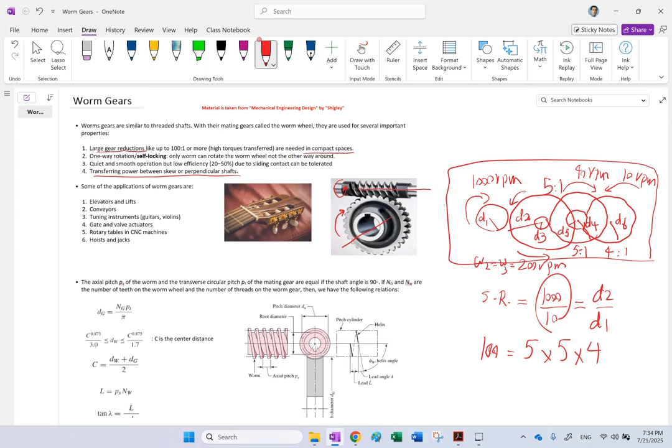Now, of course, in this X direction here, you need quite a bit of space to include all of those gears. If you don't want to do all of those gears, which equals space and equals cost and money, you can do it with a single worm and a single worm wheel. These guys can reduce the RPM by factors up to like 100-to-1 or even more in a compact space, and so they can also transfer big torques.

Now you might say, how come? Well, per one full rotation of the worm, when this worm goes one full rotation, or 2 pi radians, guess how much this will move forward? Because the teeth of this wheel are being pushed by these threads, and the amount of displacement for each thread is only 1 pitch, correct? When you rotate it 2 pi radians, it only moves by 1 pitch. And since each one of them is in contact with one of the teeth here, all you will get here for the rotation is simply 1 tooth.

So all this guy will rotate is 2 pi divided by the number of teeth. So you see the ratio is going to be n-to-1, where n is the number of teeth on this guy. So if this guy has 100 teeth, guess what? Your speed ratio is going to be 100-to-1. And it does it beautifully, okay? So that is the first thing, huge gear reduction.

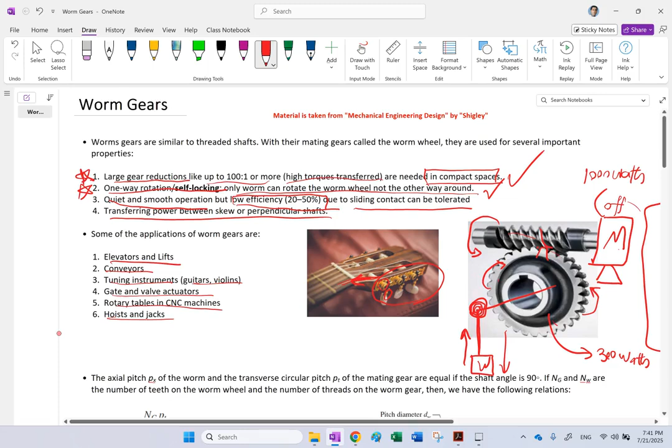The most important properties are huge gear reduction and self-locking. These are very important. That's why you typically see them after motors, because motors have huge RPMs and we don't need that much RPM. So this guy is spinning like 1,000 RPM, and I want to bring it down to maybe 10 RPM. Instead of a multi-stage gearbox, I use just one of these.

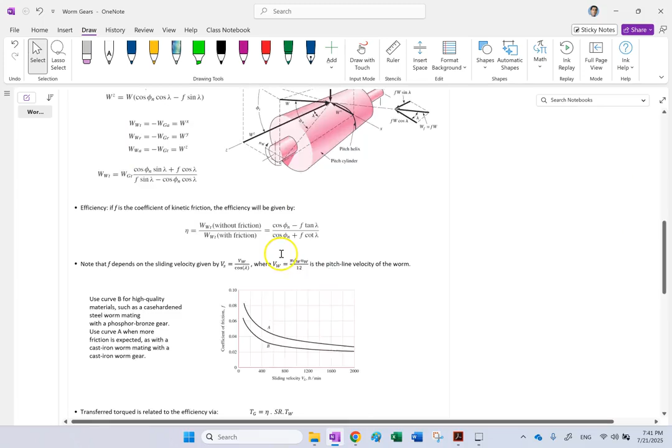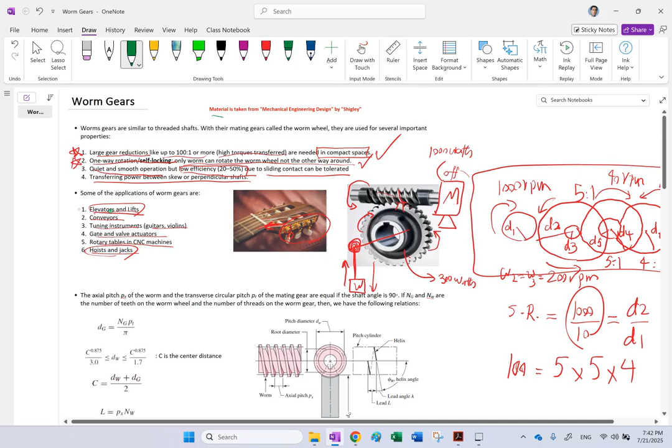The other thing it can give me is self-locking, which could be very useful, especially in elevators, lifts, hoists, and jacks. So now let's look at some parameters of the worm and the wheel - kinematics parameters, force analysis, efficiency, and transfer of torque. There are a few things we need to care about. Finally, as a bonus, I will solve one problem involving worm and wheel so you know how to deal with problems here. As in my previous videos, the material is coming from Shigley, Mechanical Engineering Design.

Now that we know it, let's look at some of the parameters involving this kind of gear. Here is a picture of a worm from the side view and the front view, and this one in gray is the worm gear, or the wheel, you might call it. So what kind of parameters do you have?

The worm is similar to a thread, so you can expect it to have something called an axial pitch, which is the distance from one tooth to another, or one thread to another - that's called axial pitch, px. The second thing is different diameters. The diameter we care about here is the pitch diameter, which is the diameter of the circle here that is tangent with the other circle. You could also define a root diameter, from root of the tooth to root of the tooth, and similarly a maximum diameter. But the one we really care about is the pitch diameter, d of the worm.

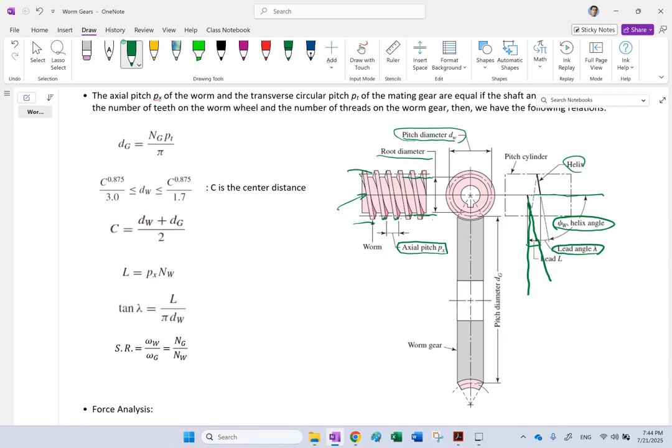These threads are on a helix, so you will have a helix angle. Helix angle, or psi, is defined as the angle between the axis of the worm and the tangent to one of the threads or teeth. The angle that this tangent makes with the vertical axis, on the other hand, we call the lead angle, or lambda. In this picture, lambda plus psi equals 90 degrees. So you either make the angle of the surface with the axis of the shaft or with the vertical to that, and call it either lambda or helix angle.

The other thing is the lead. The lead is basically the distance between two similar points - the distance from here to here. You might ask, what is the difference between lead and pitch? Because they look similar. Well, the answer depends on how many threads there are per one revolution.

If in one revolution you only have one tooth engaged, then lead and pitch are equal. But if you have more than one thread in the worm causing the linear motion, you show that by NW, the number of threads or teeth it has. Then the number of teeth times this pitch is going to be equal to the lead.

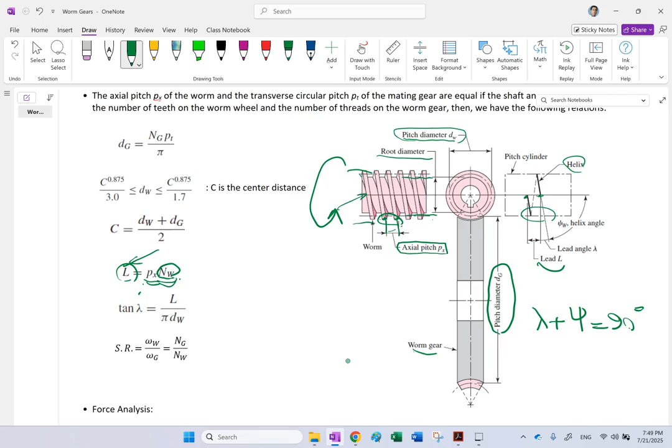For instance, the diameter of this pitch circle here can be defined as n, the number of teeth on it, times p—this p is the circular pitch in the transverse direction for this gear—divided by pi. Because if you remember, the definition of p transverse was pi times d divided by n. So if you solve for d, it's pn over pi. So the formula you had for the spur gear is still valid here.

Now c, the center to center distance, is the distance from this point to this point here—that is your c. Clearly it is this distance, which is half of dg, plus this distance, which is half of dw. So that is similar to any other two gears. Center to center distance is always the average of the two diameters.

Now, one formula common for these worms and wheels: if you want to pick a number for the diameter of the pitch for the worm, make sure it is between c to the power of 0.875, or 7 over 8, divided by 3, and c to the same power but divided by 1.7. So if you want to pick a worm and know the diameter of its pitch based on the center to center distance, this is the good range to pick. And you might ask, where does that come from?

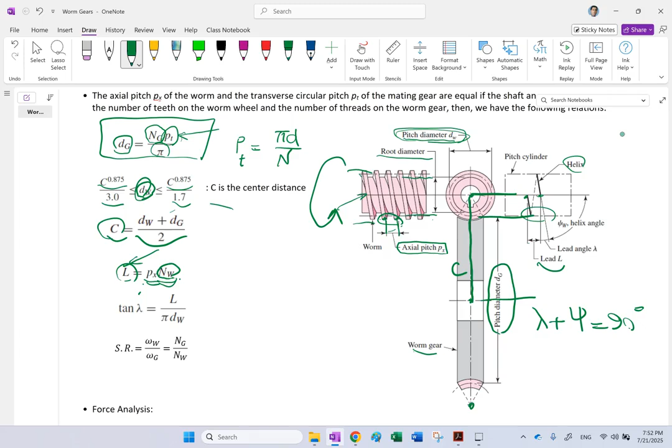If you pick it in this range, you can optimize the efficiency number. So if you want bigger efficiencies, you have to pick a dw in that range. If you pick it outside the range, you are going to get lower efficiencies. This is an empirical formula, clearly.

What else do we have? The speed ratio is the omega of the worm, because the worm is always the driving member, over omega of the wheel, which is the driven. It can simply be written as the number of teeth on the wheel divided by the number of teeth or threads on the worm. The same formula we had in the spur gears also applies to the worm and worm wheel. So if I have only one thread here and 100 here, you get a speed ratio of 100 to 1.

The next thing is the relation between the lead angle, the lead itself, and pi dw. If you unwrap one of these teeth as it goes around, you see that basically you're going to get something like this.

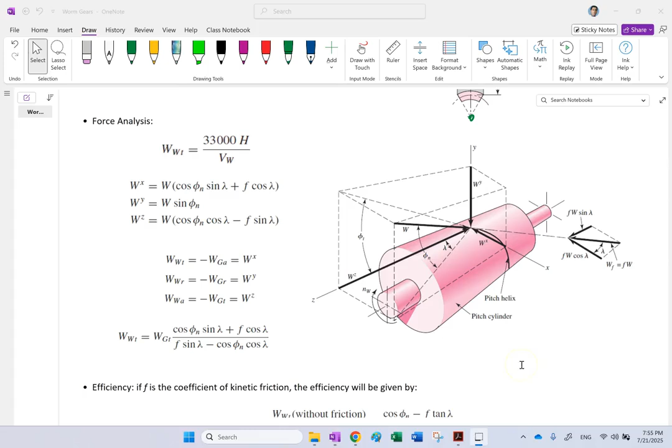Now, what about the force analysis? Force analysis is quite a bit interesting. Why? First of all, between the tooth of the wheel and the tooth or the thread of the worm, there is a three-dimensional force exchanged.

Which has three components. It has this vertical component Y, which is like a radial component. It has the other radial component X, and it has an axial component Z. Now, between these, the X component is, although it's radial, it's also a transverse component. So X is the one that is gonna create the torque.

You can see it here. Wx is the transverse component. Y is the radial component. And Z is clearly the axial component for the worm. So this is the force, this is the normal force between the two teeth.

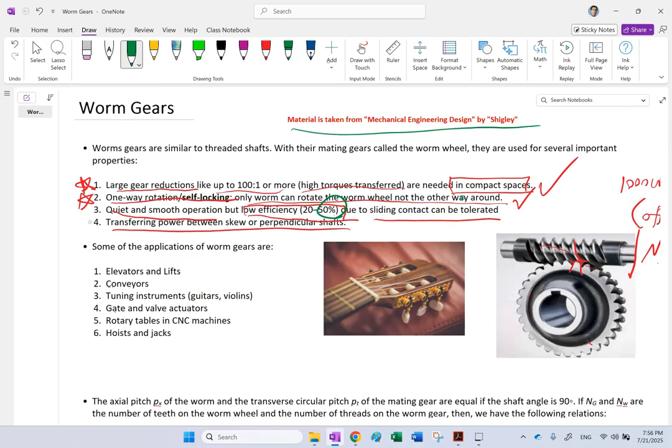But that's not the only force. Remember, I said that here you have friction. The tooth of the worm and the wheel are sliding against each other. It's all about sliding contacts. So there should be some kinetic friction force as well.

And this guy here is your kinetic friction. So you have two major forces. One is the W or the N force, the normal force. And the other one is the friction. And these are just their components.

So which direction is the friction? Of course, the direction of the friction, if you look at it, it is tangent to the helix. It is tangent to the tooth profile, the tooth or the thread of the worm. So it is tangent to that. It is in that plane.

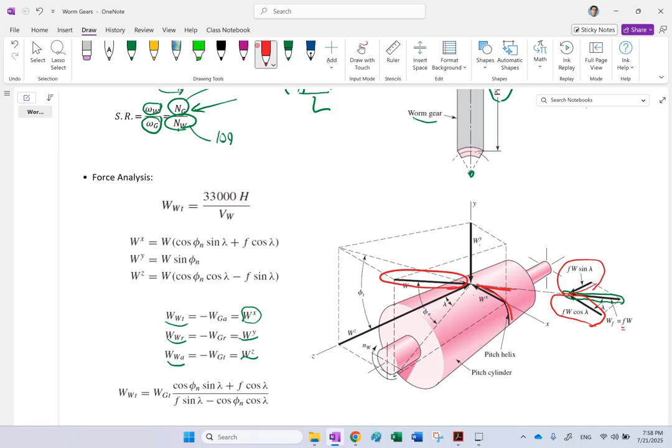So I can break it down into two components. One that is in the axial direction and one that is in the transverse direction. So my friction force, which is F, here this F acts like mu, the coefficient of kinetic friction, or mu k. If I multiply that by the normal force, and W here acts like N, the product of them is the kinetic friction, Fk.

So in other lectures of mine, you see I say Fk equals N mu k. Here it says Wf equals F times W. But that's the same thing, this is kinetic friction. And you have two components, sine lambda and cosine lambda.

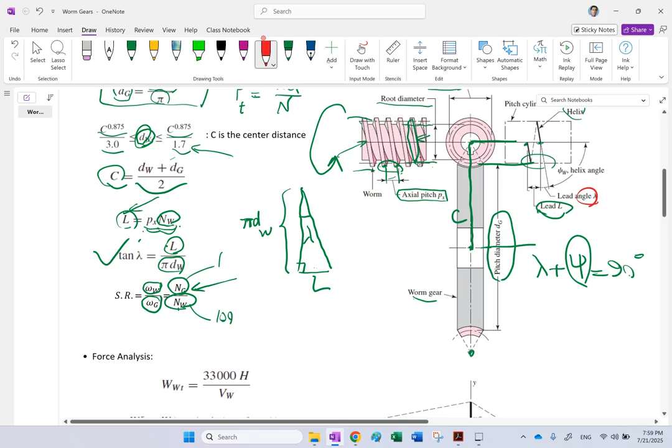Why? Because this angle here is your lambda. That is this same lambda angle, and you know that lambda is the angle that your helix is making with this vertical direction, and that is exactly what you have here. This is that vertical direction, and this is the direction of tangent to the tooth, so that is your lambda. So here you have these two components.

Now this tangential transverse component, Fw cosine lambda, this is added to that Wx. You can see it here, look, this is this guy. And this one, which is the axial component, this is in the opposite direction of W, so it should be subtracted from that, and that is what you can see here. So those two components that you see, those plus and minus Fw cosine lambda, those are the friction components.

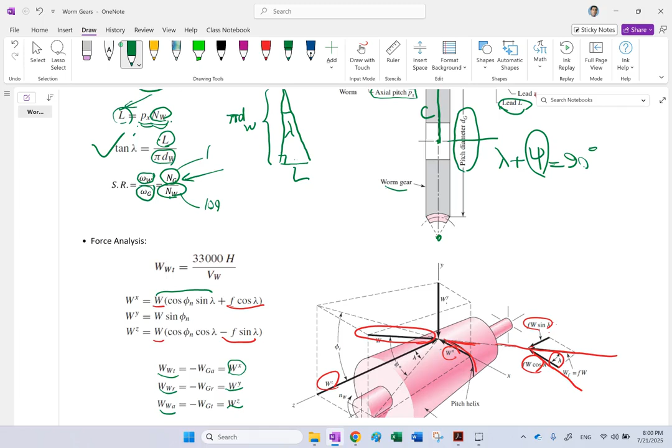Now, what is the rest of it? The rest of it are clearly these guys here, this W cosine phi n sine lambda, W sine phi n, and W cosine phi n cosine lambda. These are your W, X, Y, and Z in this picture, and you can clearly see why, because your W has this angle phi n, which is your normal pressure angle, and it has this angle here, lambda.

So when you want to decompose this W along X, Y, Z, you have to use sine phi n and cosine phi n, and then sine lambda and cosine lambda. So you get these three forces, and as I said, these three forces, the X one is the transverse one, that's the one that transfers the torque. The Y one is the radial one that is applying to the bearing, and the Z one is the axial one that wants to move the worm left and right.

So you need to have some bearing on this side or that side that has an axial load and doesn't let the worm move.

Okay, so you see that the formulas for the force in a worm are quite a bit involved, and I just explained that to you. Now let me show you this middle part here. What is this middle part?

Let me explain that. By the way, the transverse component of the force for the worm, which is this guy here, as I said, is the one that transfers the power or torque. So you can find it by the same formula we had in spur gears, which was 33,000 times H over V of W. H here is your horsepower, the horsepower applied to the worm, right?

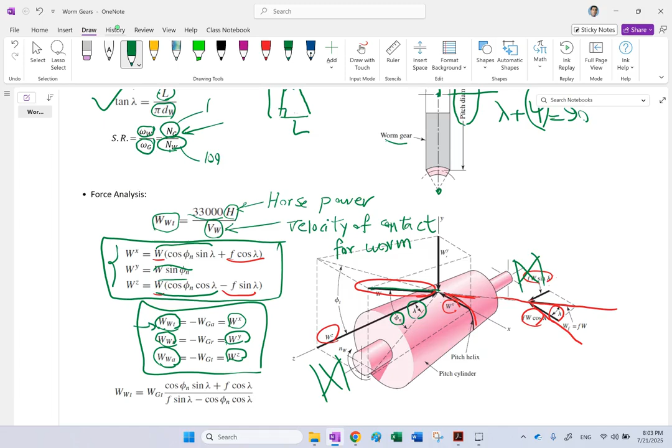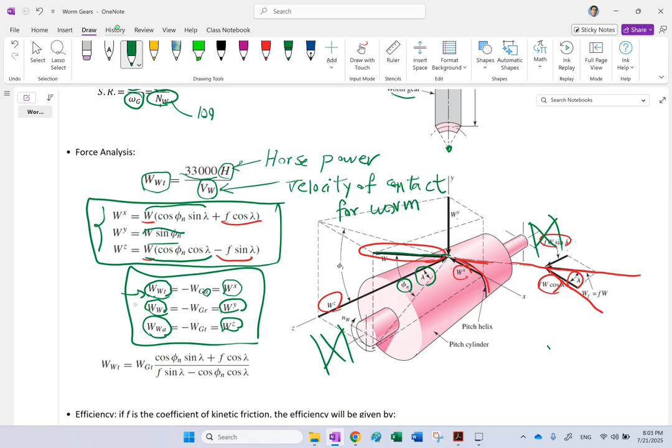Now, let me, as I said, explain this middle part here. If you look here, it says that the transverse force for the worm is the axial force for the gear or the wheel with a negative sign. Where does that come from?

Here you need to add a gear like this, the wheel, and what's going to happen here? These are the threads, and this guy is spinning like this. So let's say it is pushing this guy forward and it is spinning like this one. For this one, because the axis of this is in this direction, the axis of the gear is like the x-axis for the worm. So any force that you have in the x-axis, which is basically your transverse force for the worm, is going

to count as the axial force for the gear, right? Because it's action and reaction. So if the gear applies Wx to the worm, the negative of Wx is going to be applied to the gear. And as I said, this is the axis of it. So that's where this comes from: the axial force for the gear is the transverse force for the worm, except with the negative sign. Why negative sign? Because of the action and the reaction, of course.

Good. What about the radial force? Well, when you apply this Wy, then the opposite of that is going to be applied to this. So it is going to be Wy like this. And clearly, this is the radial direction for that. So the Y, which is the radial direction for the worm, is also the radial direction for the gear, except with a negative sign. And that is this guy here that you can see.

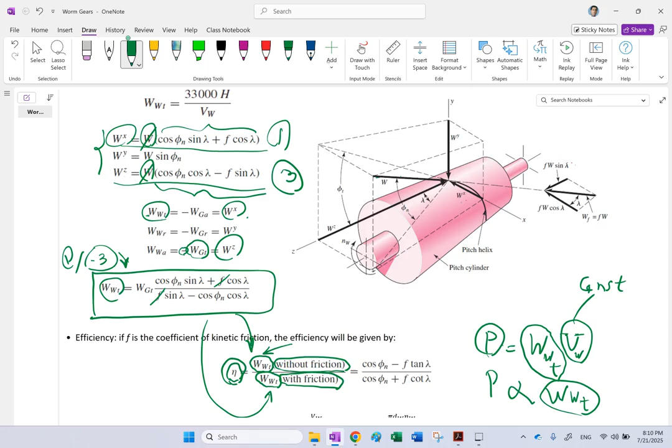One time without friction. What does without friction mean? It means get rid of F. Remember, F is your friction term. So in one of them, get rid of F. So you get WGt cosine phi n sine lambda over negative cosine phi n cosine lambda, and these guys can cancel out.

In the other one, do include the F, because it's with friction. Simplify it, and you get this beautiful formula if you do a little bit of algebra. So the efficiency is equal to cosine phi n minus F tangent lambda, over cosine phi n plus F cotangent lambda. This is the formula for efficiency in a worm gear.

Now, what parameters are involved? The first one is the coefficient of friction. Clearly, when this F goes up, this negative term gets bigger, so the whole numerator drops. The denominator gets bigger, so the denominator goes up. So you can see clearly the whole thing drops. Bigger friction means a smaller efficiency, and it's kind of obvious here.

What about this one? This also has an effect. The pressure angle has some effect. The other parameter that has an effect is the lead angle, lambda. And lambda is a function of what? If you look at it, lambda is a function of lead and is a function of the diameter of the worm, the diameter of the pitch circle for the worm.

Okay, so from these two, you can find a formula for lambda, which is like arctangent of px Nw over pi dw, right? There we go. And we're going to use this formula in the example that I'm about to solve.

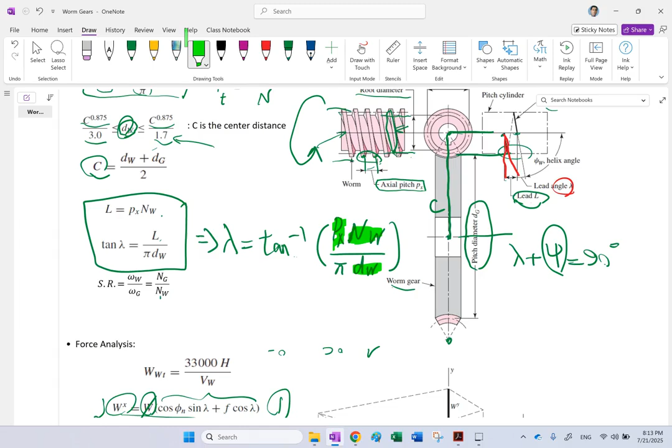So you see, the way that I can affect the efficiency is clearly I can change the size of the worm, I can change the number of threads on the worm, I can change the axial pitch on the worm, I can change the friction coefficient, and I can change the normal pressure angle. Okay, all of them can be done.

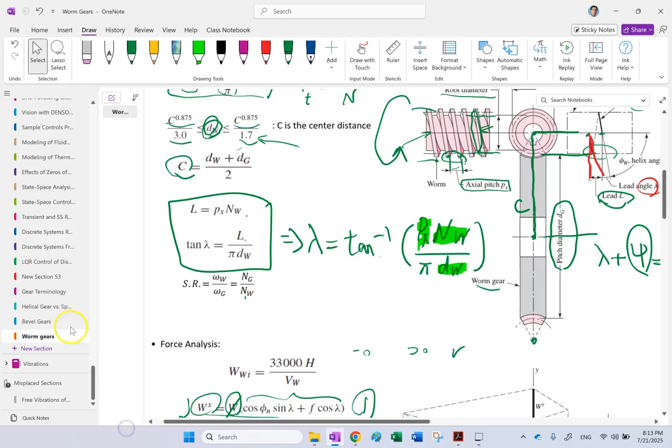And by the way, the relation between phi n and phi t, if you remember, if I go back and show you the helical gears, let me show you that. So there was a relation that we had between phi n and phi t, which was by cosine of psi. The same relation exists here. Okay, so still tangent phi n equals cosine psi tangent phi t. Okay, so these two are still related, because you can see both of them also here.

You see phi t and phi n. So I can still say that tangent of phi n equals tangent of phi t times cosine of psi, and psi here is 90 degrees minus lambda, or that lead angle, that helix angle that you have.

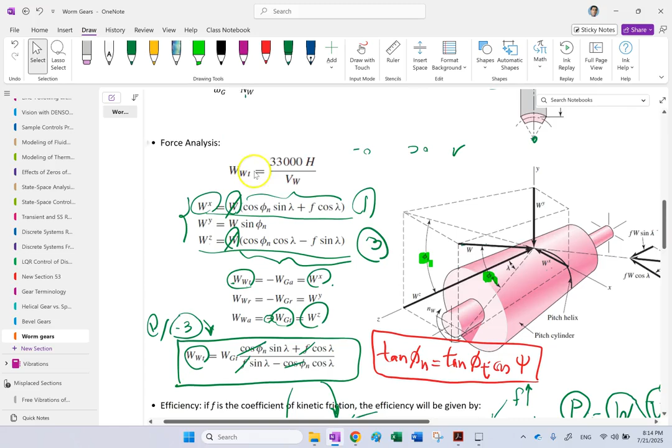Okay, so you can still use this. By the way, this is t, okay, that's not a plus, so this is times cosine psi. So all of those formulas are valid, and again, I'm going to use them.

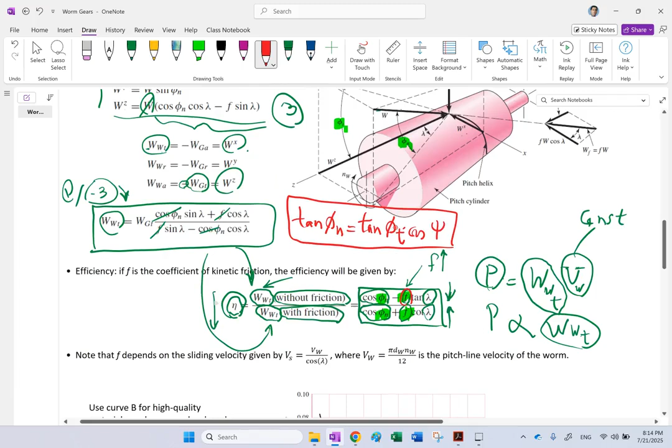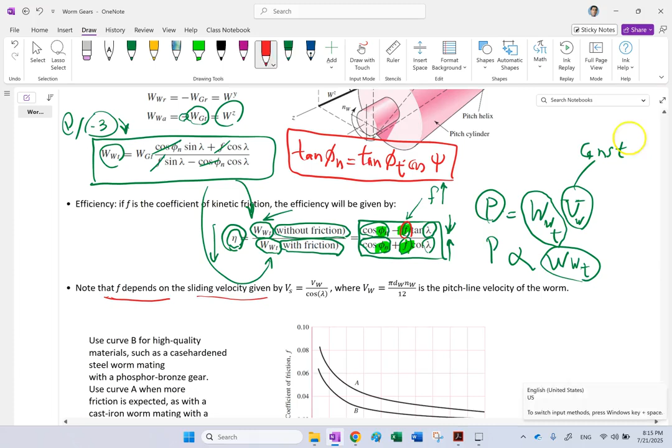Now, one more delicacy is this friction here, this coefficient of friction. Is that a constant number? For instance, if you have a worm and a wheel from two different materials or the same material, is this coefficient of kinetic friction a constant number? The answer is not really. The coefficient of kinetic friction does depend on the relative sliding velocity. The faster the worm moves against the wheel, the smaller this kinetic friction is going to be, and vice versa.

And you can see that here. This is F versus the sliding velocity Vs. The bigger the Vs, the further this guy drops. Now, it's not going to be a big drop, but still it's considerable. So you might start at 0.08 and end up at like 0.03 or something, depending on how fast in feet per minute this guy goes. And these guys are basically empirical curves.

The first question is, even if I'm given a curve like this, where do I find this slide velocity? The slide velocity, you can show, is given by the worm velocity, Vw, over cosine of lambda, cosine of the lead angle.

Now, what is the worm velocity? As I said, the worm velocity is the formula that we had in spur gears. It was pi times d of the worm, times n of the worm, divided by 12. And this n here, pay attention, this is the RPM of the worm. It's not the number of teeth. This is small n.

So if I find the velocity of the contact point here of the worm and plug it right up there, I can find my slide velocity, and then whenever I have it, I can come here and say, well, I have 900 feet per minute. I go to this curve, and then I project it here, and maybe, I don't know, 0.035 or something.

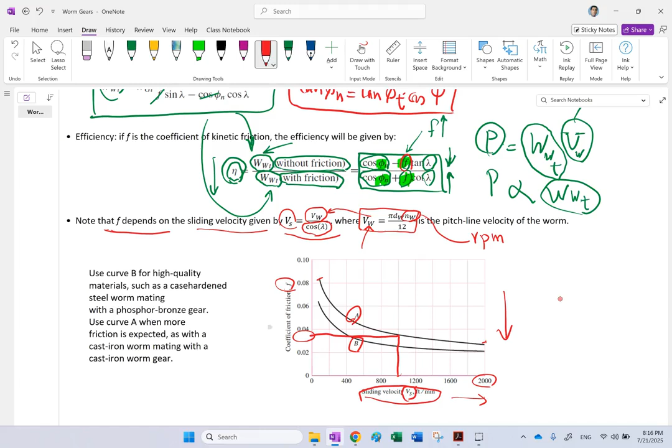Now you might say, why are there two curves? Each one of these curves is for a different scenario. These curves are all coming from Shigley. Let me tell you what is curve A, what is curve B. Curve B is for high quality material.

Like if you have a worm that is made of steel that is case hardened, and the gear is made from a phosphor bronze, so this guy is really hard. This guy is amazing against wear and tear and sliding. So they work great together, and you see their materials are different.

So for this high quality material, you're going to use curve B, which has a smaller friction. Curve A is where your material is not as good, you can have more friction. For instance, your worm is made of cast iron and the wheel is also made of cast iron. The surfaces are not that beautiful, the materials have more friction in them, so then you can use curve A. So curve A is more friction, lower quality material, high friction material. B is better material, smoother material, low friction material. Okay, so these are the two empirical curves.

Now, the last points before we go over the example. One, how much torque do you get out of the wheel or the gear? The torque that you will get out of the gear is going to be the speed ratio times the torque that you apply to the worm. This is your input torque, this is your output torque. Ideally, the ratio between them should only be equal to the speed ratio, because the speed ratio for two spur gears is equal to omega in over omega out, which is equal to torque out over torque in.

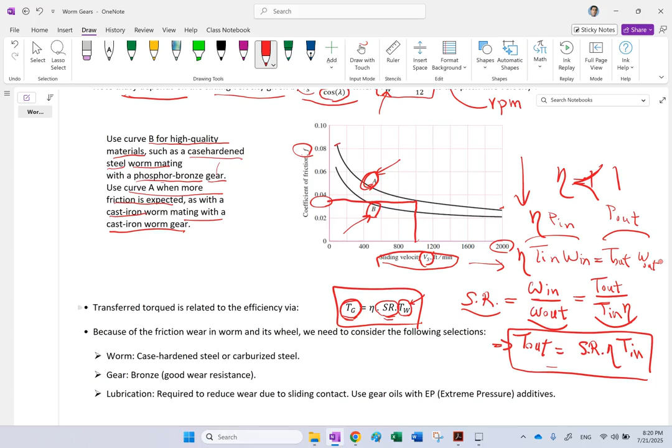So there will be an eta here. When you do that, you're going to get an eta right down here. So when you cross multiply, that eta shows up and you get this formula. If you know how much torque you apply to the worm, your speed ratio, which is the ratio of the teeth, and you know your efficiency based on this formula, you can multiply all of them together and see how much torque you can get out of the wheel or the gear.

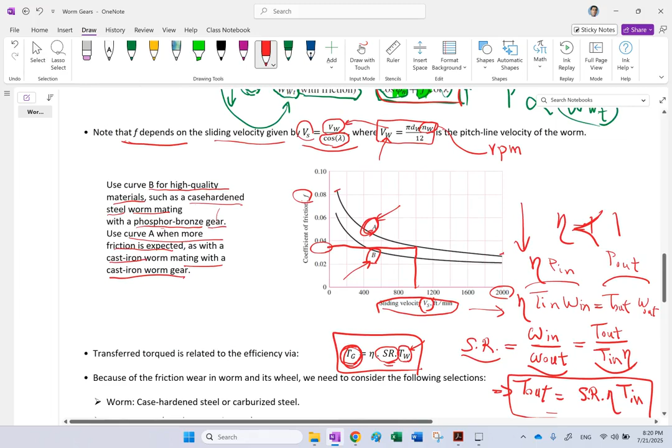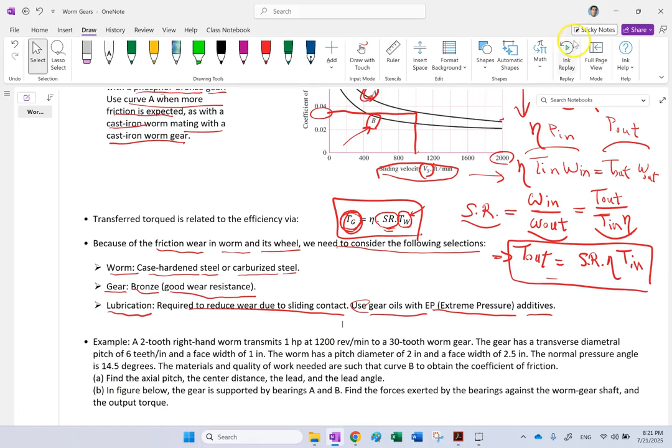Now, because there is friction wear in the worm and the wheel, you need to consider the following things. One, make sure your worm is made of case hardened steel or carburized steel. Make sure the surface of the worm is very hard. For the gear, make sure it has great wear resistance, like bronze. And make sure you do a good job with lubrication to reduce the sliding contact. Something like extreme pressure additives, specific gear oils, can reduce the friction big time and bring that F number down. So make sure when you pick worm gear and lubrication, you do it for minimal wear and tear, minimal deformation, and minimal friction.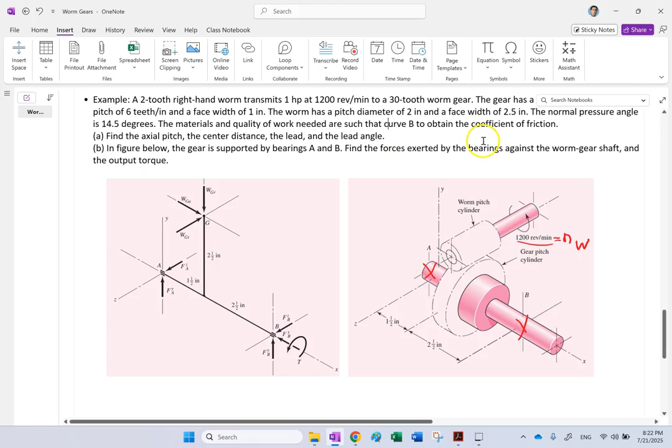Now that we have said all of this, let's look at one example together. So what does the example say? It says, in this case here, this is the worm, this is the wheel. The RPM of the worm is 1200, so this is a small n, this is a small n of W. Wheel is supported at points A and B by two bearings. Let me see if I can move this a little bit. There we go.

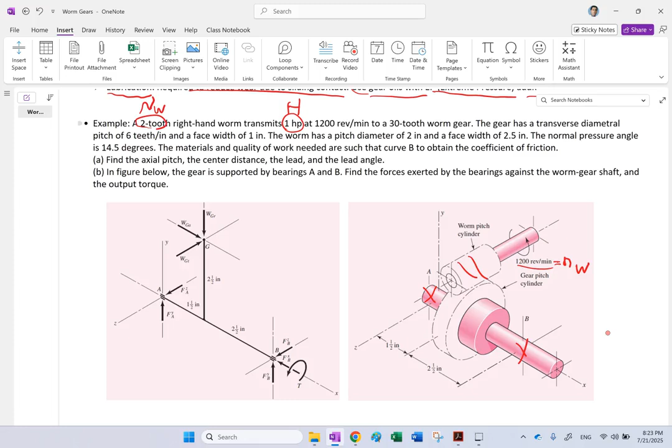The power that is applied to the worm is only 1 horsepower. So this is that H parameter. How many teeth are on this active? How many threads are on it? 2. So this guy is N capital of W. It is engaged with the wheel that has 30 teeth. So this is the N of the G.

The gear has a transverse diametral pitch of 6. So this here, the 6 teeth per inch, this is diametral pitch, and diametral pitch is the number of teeth divided by the diameter of the pitch circle. So NG over DG for this guy is 6 over 1 inch. The face width is 1 inch, so the thickness of this guy is 1 inch. The worm has a pitch diameter of 2, so this 2 here is that D of W. And a face width of 2.5, so this guy here is 2.5 inches. The normal pressure angle phi n is 14.5 degrees.

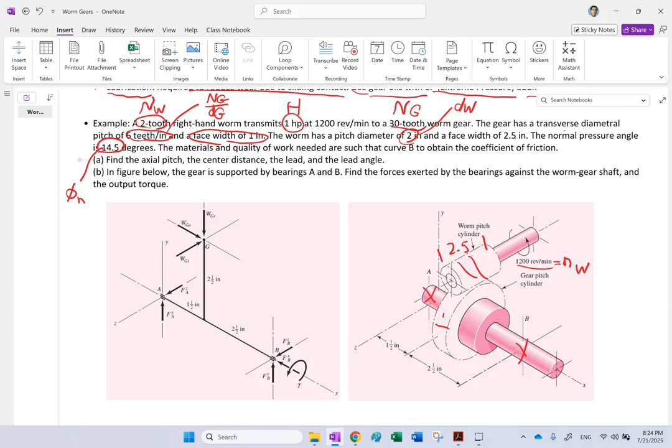The material are such that use curve B to get F from this. So the material here for worm and the wheel are good material, low friction material.

What do you need to find? First, find the axial pitch of the worm, which is Px. Find the center distance C. Find the lead and the lead angle, L and lambda. Then in this picture where the bearings A and B are supporting your gear, find the forces that are applied to bearings A and B. And also find the output torque, right? So you need T of G.

And find the forces at the two bearings. Now here, if you look at the bearings, one of the bearings does not carry any axial load. One of them does carry an axial load. So for instance, this A could be like a ball bearing. This guy here is a bearing that can carry also some axial force. So this, for instance, could be like a taper bearing. Or if it's not a taper bearing, you might have some shoulder here on this shaft that rests against this bearing so it doesn't move. But one of them does have an axial load because the teeth apply axial load. And if you don't do it, your wheel is going to move in the X direction, and that's what you don't want. And this T is that TG that you need to find, the output torque on the system, right?

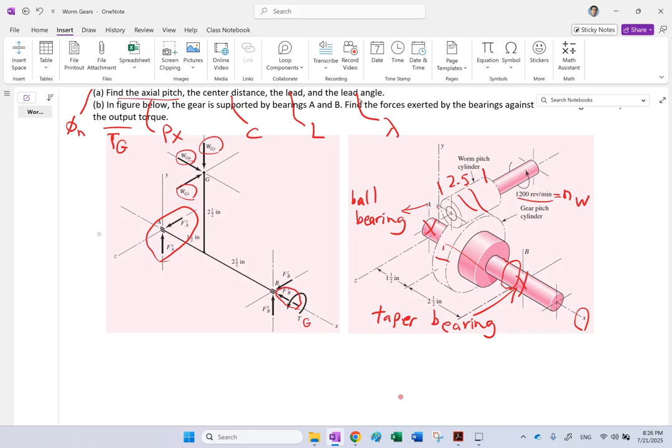The three forces that you have here are the radial force, the axial force, and the transverse force applied between the teeth of the gear and the worm. And these three guys coming from the actual W, the normal force, as well as the friction. So they are these guys. One of them is this, one of them is this, the other one is this. You can see them here.

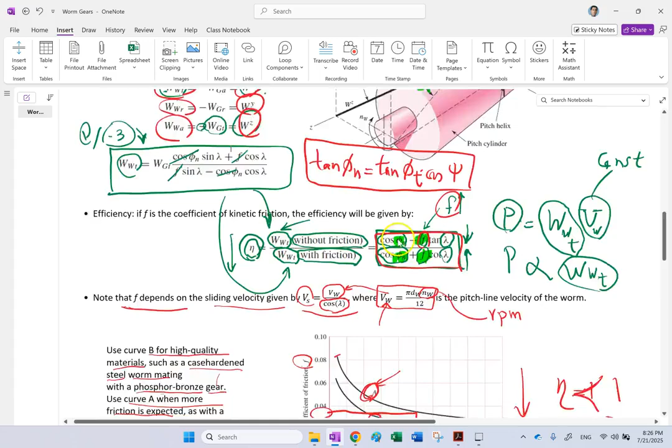Where do you get your F from? F is going to come from that graph here, and it is going to come from curve B. So we are going to need this graph.

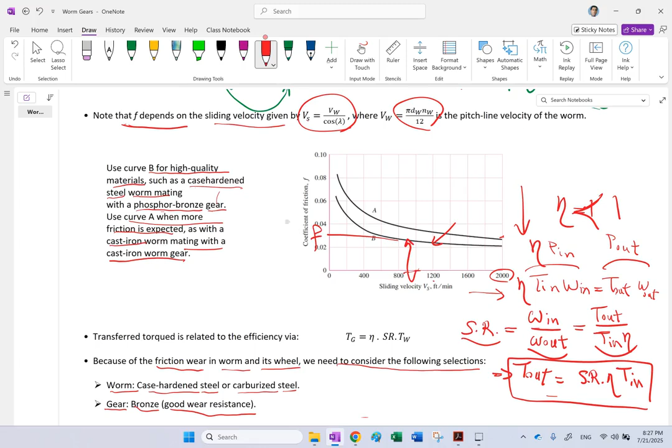To use this graph, we clearly need to calculate these velocities. First I need to calculate this, then plug it here, calculate Vs. Once I have Vs, then I go to curve B, and from there I can find my F. So I need to calculate all of these. Let's go ahead and start.

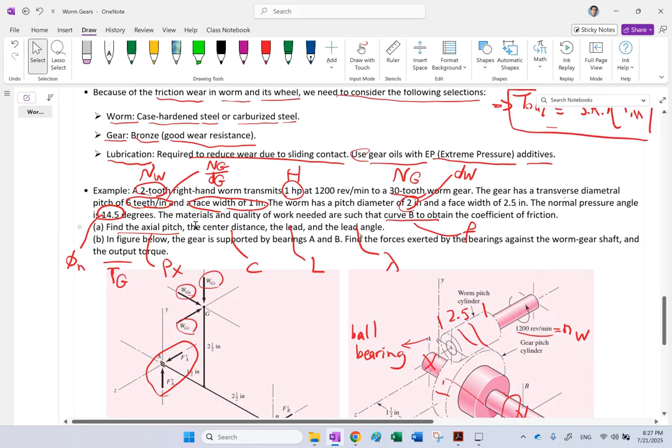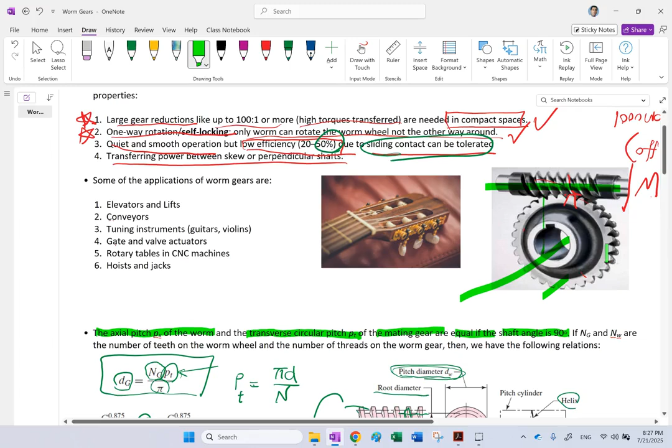First, we go with part A, find the axial pitch of the worm. One thing I skipped that I need to talk about is this line: the axial pitch of the worm and the transverse circular pitch, PT, of the gear are equal if the shaft angle is 90 degrees. That means they are askew at 90 degrees. So when it says 90 degrees, it doesn't mean intersecting. They are still askew, but if you project them on the same plane, this angle is kind of 90 degrees.

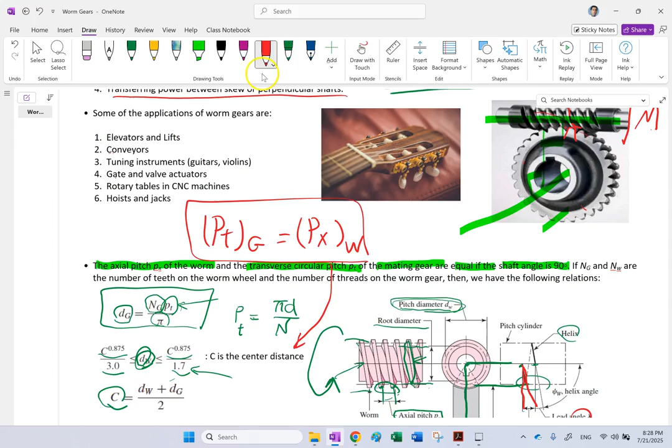So here you can say that PT of the gear is the same as px of the worm. This is another one of those equations that can come down here. So that's the first thing we can use for part A: px of the worm is equal to p, small p, pt of the gear.

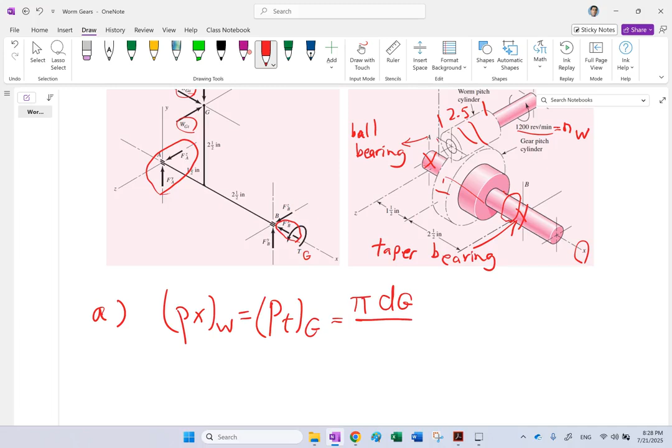And what was the definition of p? P is the circular pitch. If you remember, the definition of circular pitch is pi d over n, so this is pi dg over ng. This guy here is called the gear modulus, and the reciprocal of that is called diametral pitch. So another way to write it is pi over diametral pitch of the gear, so this guy here is 1 over diametral pitch. And how much was diametral pitch in this problem? You can see that it was 6 teeth per inch.

So if you simplify, you're going to get 0.5236, and it's going to be in inches, or inches per tooth. So that's your first number.

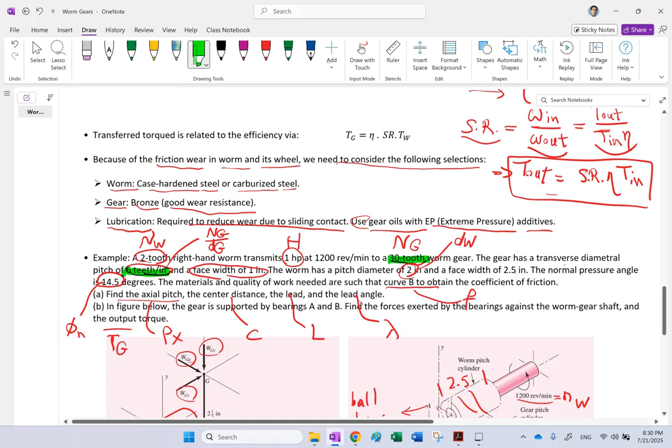Then what? Then you need center to center distance, C. Remember, C was the average of the two pitch diameters, dw plus dg over 2. Do I have the two numbers? Well, dw is directly given to me, that's 2. dg is not given, but I can find it, because I have the ratio of n over d, and I have n. So from these two, I should be able to find d.

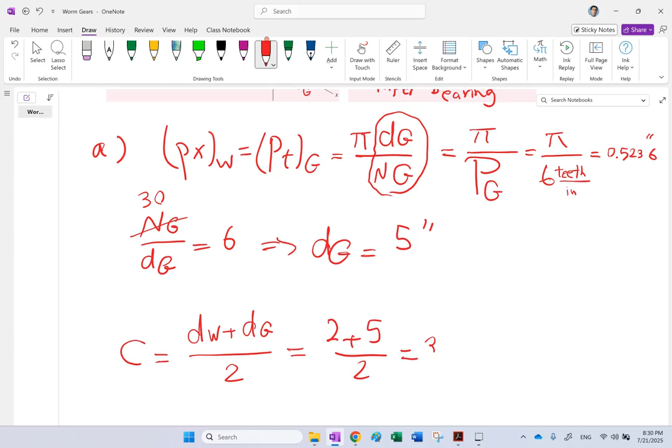So let's go ahead and do that first. Before I do this, I need to first find the pitch diameter for the gear. So I say ng over dg equals 6, and ng is 30. So from here, dg is going to be 5 inches. So now this is like 2, and this is like 5 divided by 2, and you're going to get 3.5 inches, center to center distance.

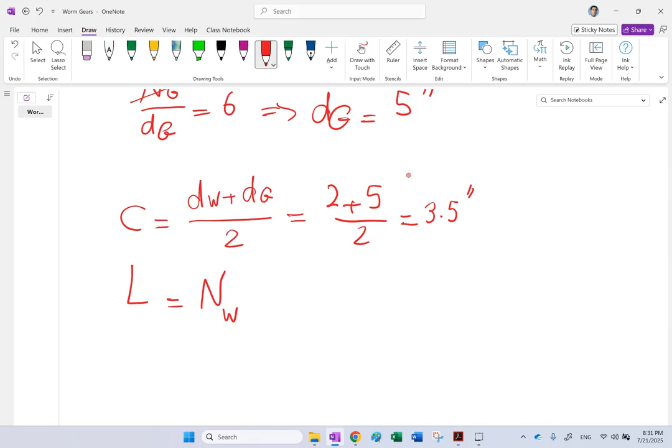What else? Next thing is lead, L. How do you find L? If you look at the top, the formula was the number of threads times the pitch. The number of threads in this case is 2 - if you look at it, that's 2. And the pitch I just calculated, that is 0.5236. So you are going to get 1.0472 inches. This is how much any point on the worm moves forward or backward when you rotate it one full revolution.

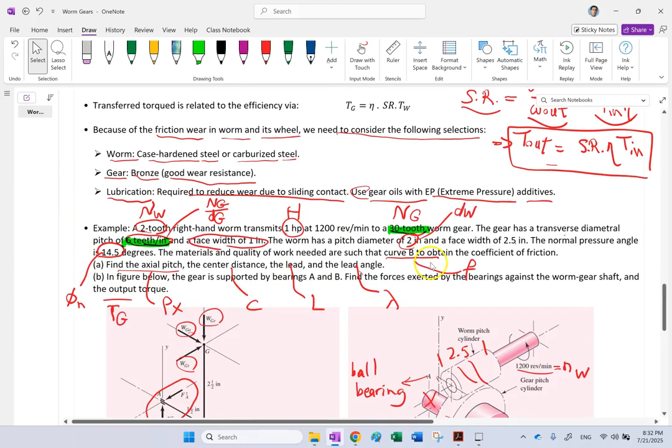Then it says find the lead angle, lambda. If you remember, lambda was tangent inverse of the lead divided by circumference of the worm pitch circle. So here I have this L, I just calculated it, and dw is given to me somewhere - let's see, that is a 2 also, so dw is 2. Plugging in and taking arctangent, I'm going to get 9.46 degrees.

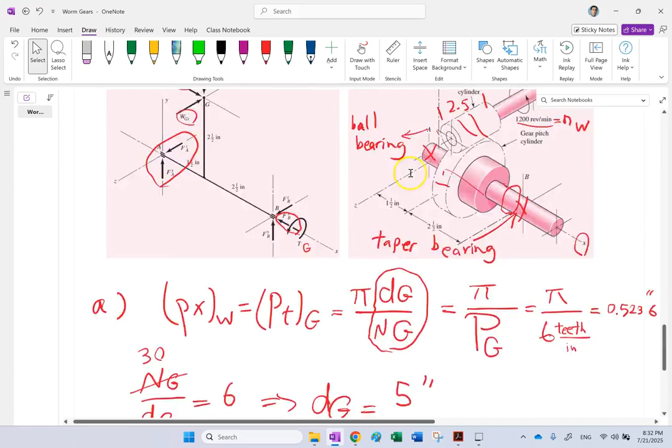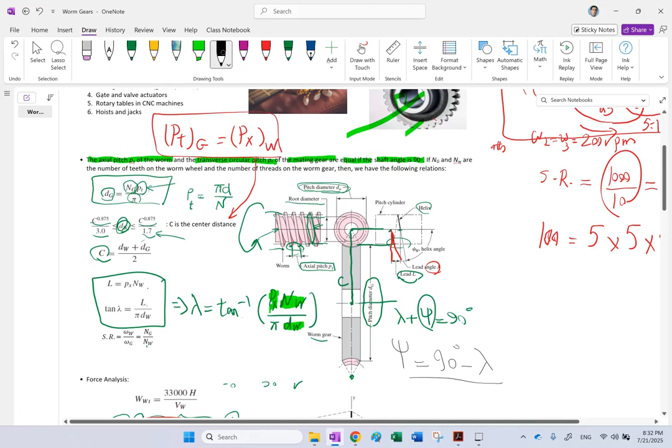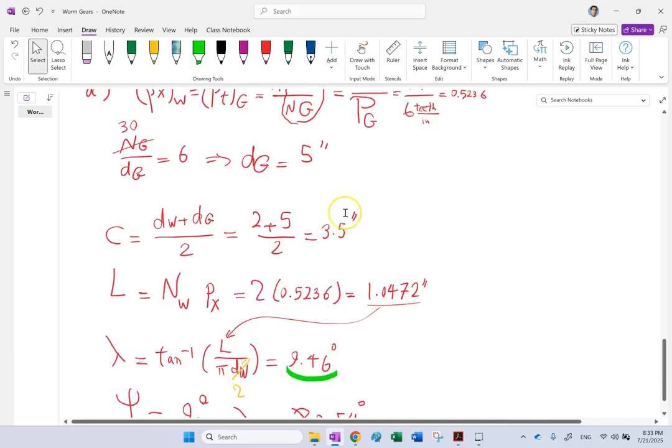One thing I need to mention is for most worms, this lambda is typically a small angle, or the other way to say it is this psi here, which is 90 degrees minus lambda - this is typically a big angle. So if I calculate psi in this case, it doesn't say to calculate it, but if I do, it is going to be 80.54 degrees. So typically the helix angle is big, the lead angle is small. That is very, very common when you look at worm problems. So this is part one of this example that I went through for you.

Now part B, we need to look at the free body diagram and find the forces. If I want to find the forces, first I need to find this coefficient of friction F. For that, I need to use this graph curve B, and to do that I need the slide velocity.

Before the slide velocity, I need to calculate the velocity of the contact point. I'm going to use this formula right here, and plug in numbers.

So now I need to go to part B. As I said, I'm going to use this formula. Do I have everything in it? I guess I do, because this one was 1200. Pay attention again that this number here is the RPM of the worm, not the number of teeth. So if you calculate this, you're going to get...

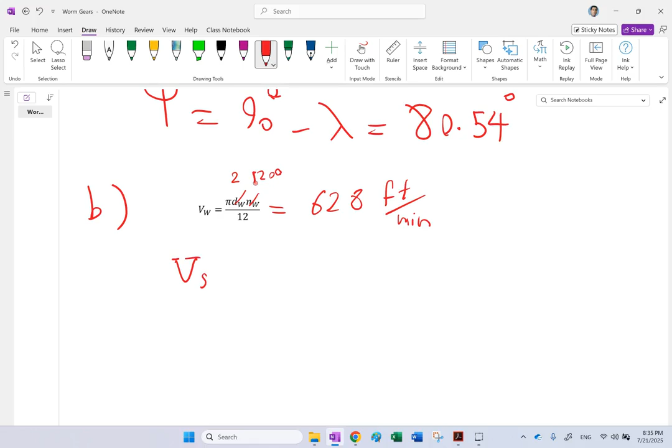628 feet per minute. Now this is V of the worm. We need the sliding velocity, and if you remember, it was V of the worm divided by cosine of lambda. Lambda we already calculated as 9 degrees, correct? So if I plug in the numbers, this is going to be 637 feet per minute. Now with this one and curve B on that graph...

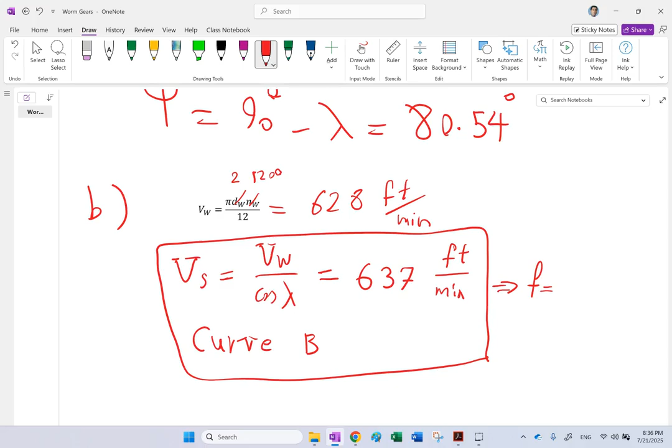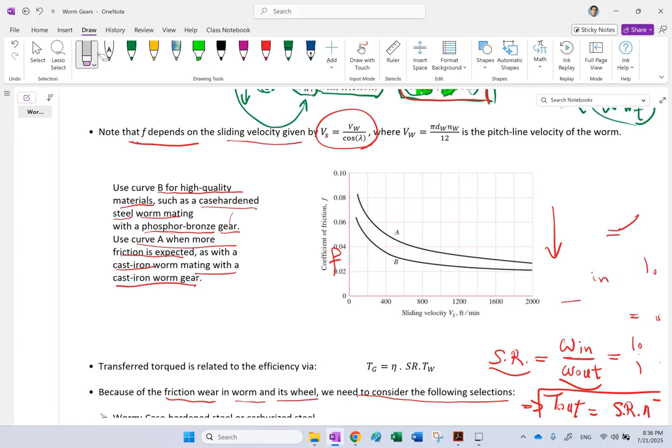We are going to see what kind of coefficient of friction we get from that graph. So if I go and look for 637, let's see if I can get something rough. Just do a fast cleaning, it's a little bit too busy in here. So 637 is almost here, so that is 600, something like that. And if you go up here on curve B and go down here, you see it's about 0.03. So here I can say that my coefficient is 0.03 for high quality material.

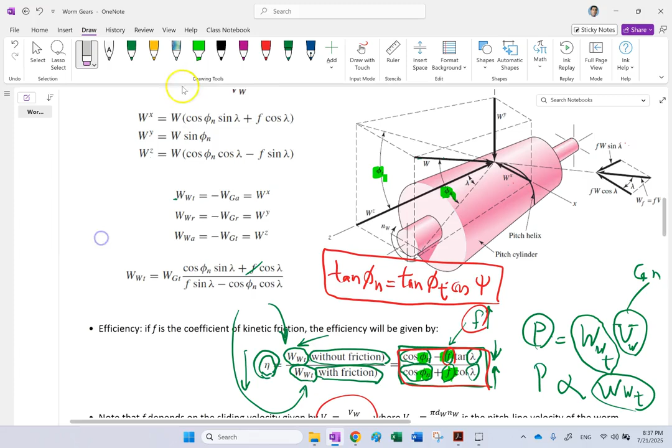Good, now that I have that, I have F. What else can I do? Can I find my force components? Now I need to go and use these formulas. The problem with them is I don't have W in them. If you look at these formulas, they need a W, and I don't have W.

But guess what? I can find Wt from this formula because I have the horsepower and velocity of the worm. So I can find the tangential component, which is the Wx. Once I have this, I can find Wy. How? Because if I divide Wy by Wx, then these two would cancel, and I simply get sine of phi n divided by cosine of phi n, sine of lambda, plus f times cosine lambda.

And since I have Wx, the lambda, f, and phi n is given to me, I can find Wy. Then I do a similar thing: I divide Wz by Wx. Again I'm going to get some similar fraction, this one divided by that, and these W's would cancel. Again, I have Wx and all of that fraction, and I can get Wz. So the first thing is I want to find my tangential force through that formula.

So the tangential force for the worm is 33,000 times horsepower divided by velocity of the worm. Do I have the velocity of the worm? Yes, it's right up here. Do I have the horsepower? Yes, remember it was 1 horsepower. So if I plug in the numbers, this Wt is going to be 52.5 pound force.

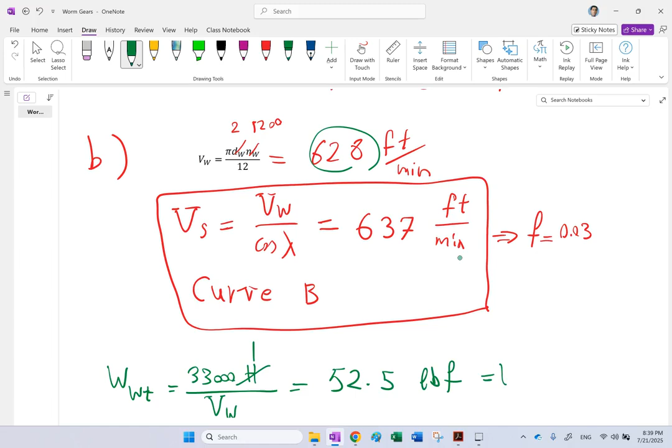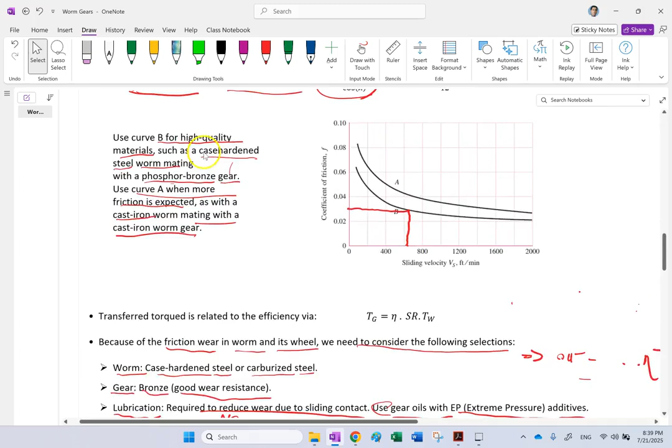And remember, this is the Wx. So now that I have that, I can either directly find W from here and plug it into the other two, or, as I said, I can do those ratios. So it's completely up to me. And you know what, let me just use that ratio thing.

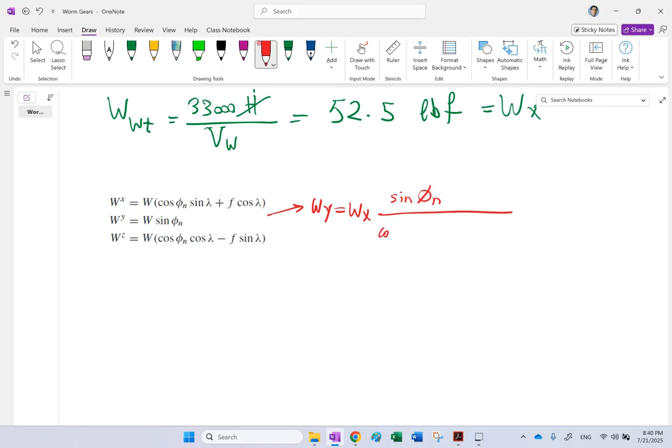So I'm going to copy this down here. As I said, from here I can tell you that Wy is going to be Wx times sine of phi n divided by all of that: cosine of phi n, sine lambda, plus f cosine lambda. And I can say Wz is equal to Wx times, again, the same denominator. Now the numerator is going to be cosine phi n cosine lambda minus f times sine lambda. The denominator is that same thing. So I can copy that and paste it down here.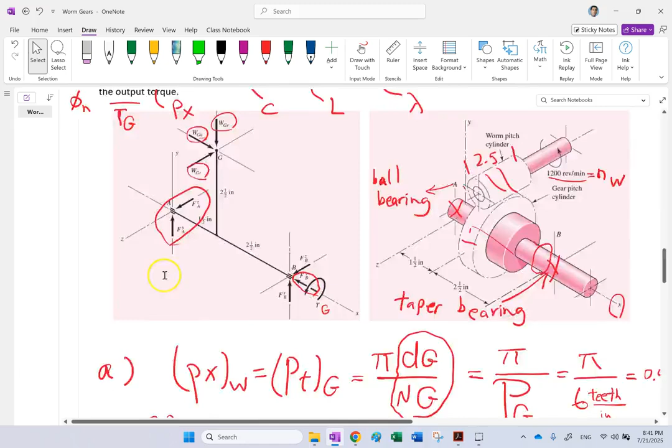Good, now do I have all the numbers? Yes, Wx I just found, that's this number, it can go here and here. My normal pressure angle is directly given to me, it was 14.5 degrees, so this guy here is 14.5. My lambda was that 9 point something degrees, right? How much was it? It was 9.46.

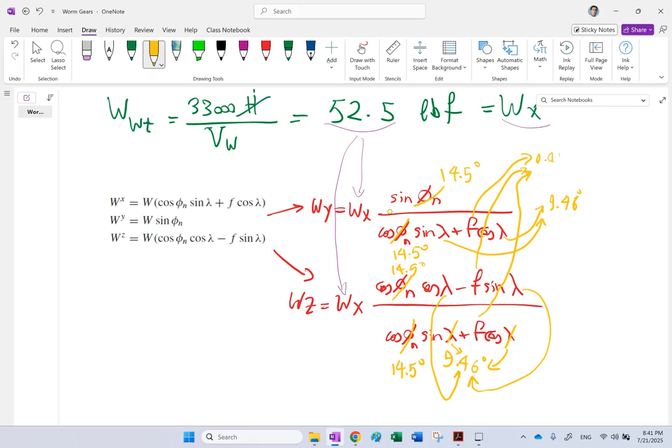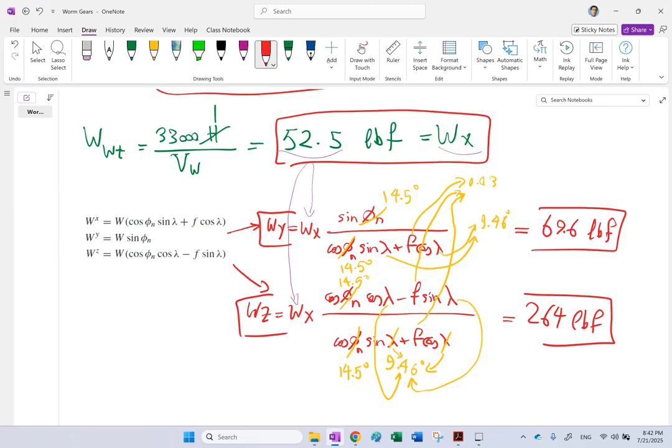And this F that you have in a few places, this F and this F, these are all 0.03 as we calculated. So guess what? I have everything, so from here I should be able to calculate my WY and WZ. And if I do so, my WY is going to be 69.6 pound force, and this guy is going to be 264 pound force. There we go, so I got my WZ, I got my WY, and I got my WX.

I got all three force components in this free body diagram. So now if I go back to this FBD, guess what? These three are taken care of, right? Because the radial one is equal to Y, the tangential, the transverse one is X. So here, this is X, this is Y, this is Z. I got these three guys. What is it that I need to find? 6 other components. What are they? The 2 forces at bearing A, the 3 forces at bearing B, as well as this torque.

And this is a 3D problem, so I can have up to 6 unknowns, and by applying the 3 force equations and the 3 moment equations, I should easily be able to find them. The only thing is this: if I take sum of the moments about any point and set it equal to 0, let's say point B, would the moment about point B, about the x-axis, also be 0 because the system is spinning about the x-axis?

The answer is it is, as long as the omega in the system stays constant. So since the omega input is constant, the omega of the wheel is also going to be constant, right? How much is it? Well, we can find it in this case. NG, NW over NG, the speed ratio, is equal to basically the number of teeth on the gear over the number of teeth on the worm, right? This is the speed ratio.

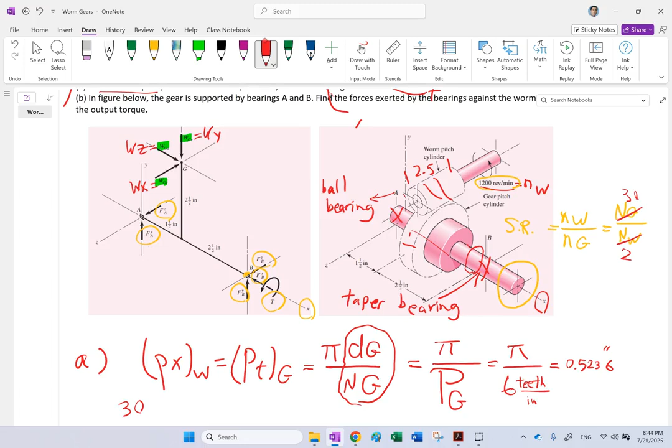Again, pay attention: small n is RPM, capital N is the number of teeth. This guy is 30, this one is 2, this one is 1200. So you see the ratio is 15, so I guess it should be 80. So the RPM for the gear or the wheel is only 80 RPM. It has a reduction of 15 to 1.

And this guy is constant. Because this guy is constant, the angular acceleration of the gear is 0. So sum of the torque for it along the x-axis, which is the mass moment of inertia in that direction, that should also be 0, especially because this part is symmetric. Now, this is a 3D problem, but since the part is axis symmetric and alpha g is 0, you can say that the torque about the x-axis, about any point—if you say torque about point D, but in the x-axis—that should also be equal to what? Equal to 0, right? So I can say such a thing as well, because the system is not speeding up or slowing down.

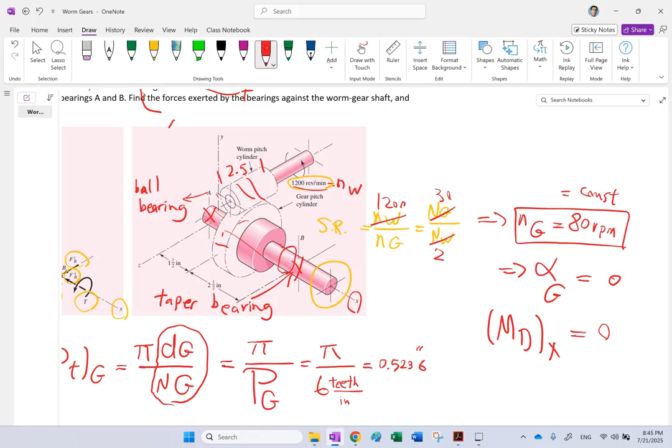And then what you need to find is the moments. So here you take sum of the moments about point B, set it equal to 0. The only moment you have for B is t in the x direction, and the moment of these 2 forces about B, and the moment of those 3 forces about B. Those 3 forces, if you want, you can combine them into a single force, call it W. And these 2 forces, you can combine them into a single force, call it FA.

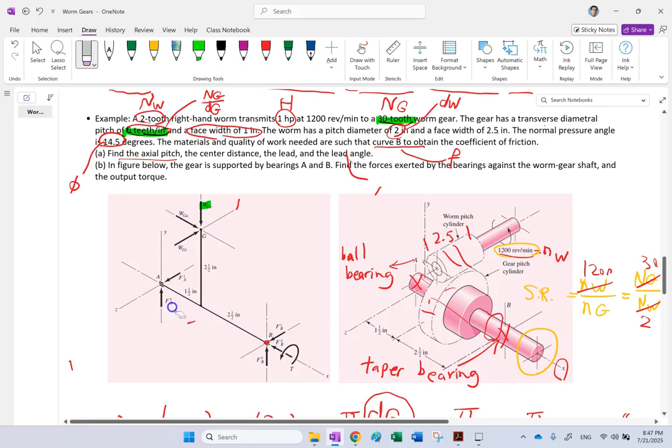So when you take sum of the moments about point B, you only need 2 position vectors. So for that, let me go down here and continue it down below. So I bring it down here. Let's see what I did. Okay, and I have those numbers.

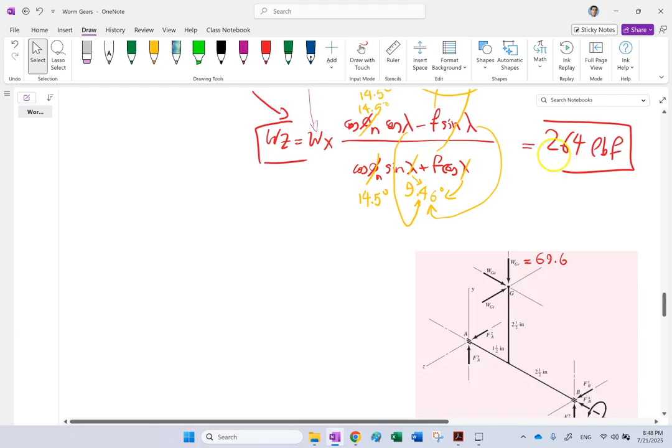69.6 should be this one. The Z, which if you remember for the gear—look, for the gear, Z is the negative tangential. So the tangential for the gear is negative, and the negative is already considered here, that's your Z, and that is 264. And the axial is X, which is 52.5.

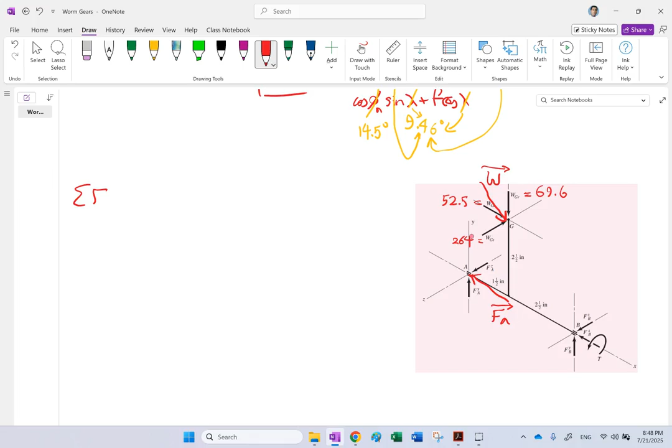Again, I combine all these three into a W. I combine those two into FA force, a 3-dimensional force. So I say the sum of the total force on the system is equal to 0. In this case, it's going to be W.

And then plus, or if I want to write it in terms of I J K, it is going to be 52.5 I, and then minus 69.6 J, and then minus 264 K. This is the W force.

Then plus FZA in the Z direction, and plus FYA in the Y direction, and then plus FYB in the Y direction, and plus FXB in the negative X direction here, and finally plus FZ in the positive K direction. This is equal to 0.

You see here, this is in the negative X direction. So this gives you three equations: the I's are 0, the J's are 0, the K's are 0. So if I want to write those three equations, you are going to get 52.5 for the I. Any other I you see, you can add it. Minus FXB equals 0. So that should give you FXB.

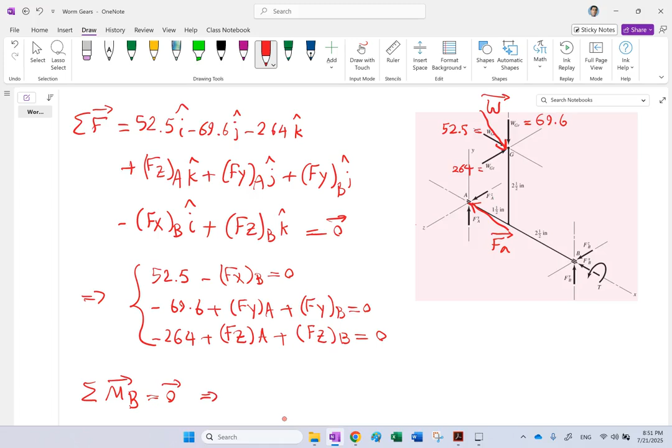Then you take the sum of the moments about point B and set that equal to 0. For that, you need to do this vector cross FA, and then this vector cross the W force, plus this T in the X direction that you have to add. If you do that, it is going to be T in the X direction plus this vector here, which if you want to write it, is 1.5 plus 2.5, that's 4 in the negative I, so it's just negative 4I.

Cross the FA force, and then this vector here, which has negative 4I plus 2.5J, cross the W force, and W force are those three known forces. This is all equal to 0.

So here you have FZA in the K direction plus FYA in the J direction. And here you have those three forces, these guys. Those guys are going to sit right there, like that.

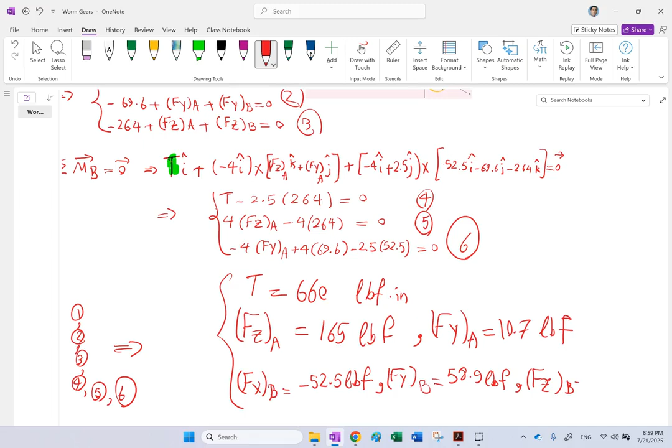And then you can find the B ones by plugging them back into equations 1, 2, 3. So here you're going to get Fx at B, which is negative 52.5 pound force. And then Fy at B, which is going to be 58.9 pound force. And finally, Fz at B, which is going to be 99 pounds.

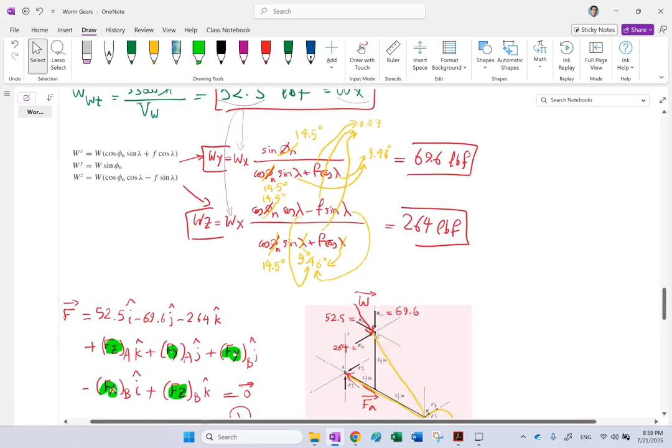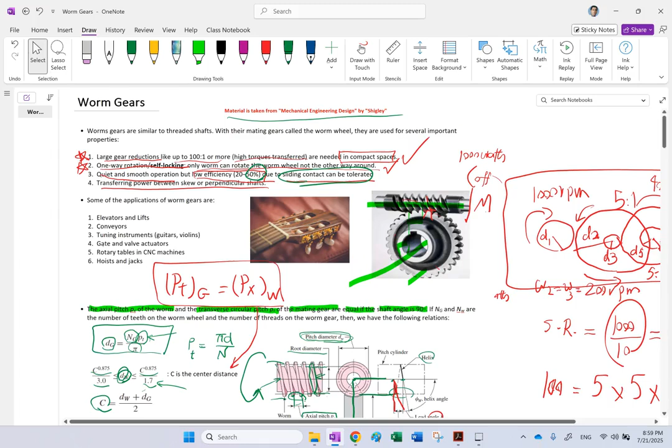There we go. So you get all six unknowns and you could solve this problem. Yeah, it is quite an involved problem, involving a bunch of calculations, but hopefully you now have a better feeling about worms, worm wheels, and worm gears. Thank you so much for your attention, and I'll see you in the next video.